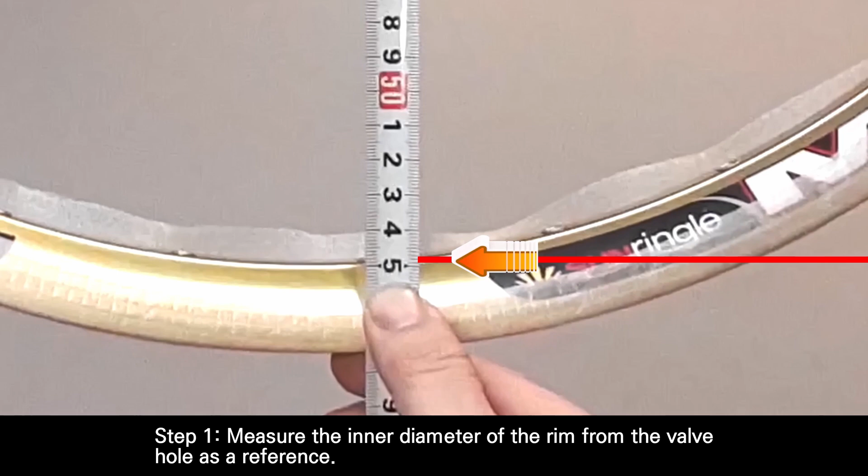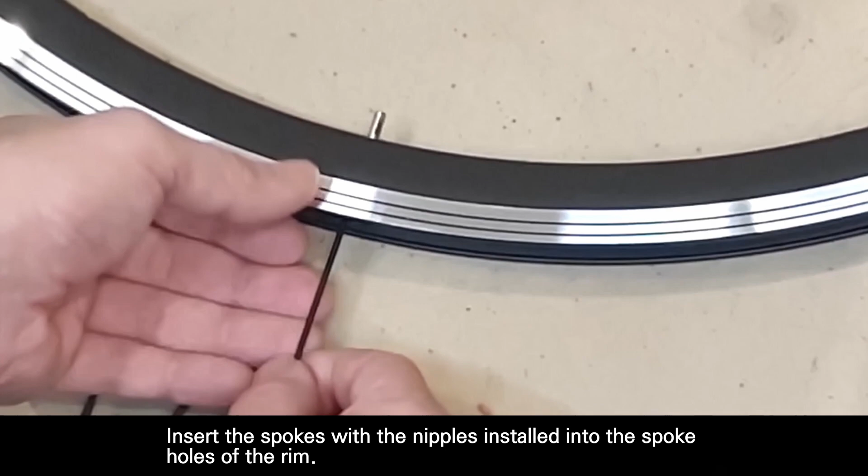Prepare a ruler and use a marker. To take the measurement, use a ruler starting from the valve hole of the rim and measure downwards. Step 1: measure the inner diameter of the rim from the valve hole as a reference. Step 2: prepare the spokes and nipples and insert them in the opposite direction. Insert the spokes with the nipples installed into the spoke holes of the rim. Use a marker to color the protruding nipples.

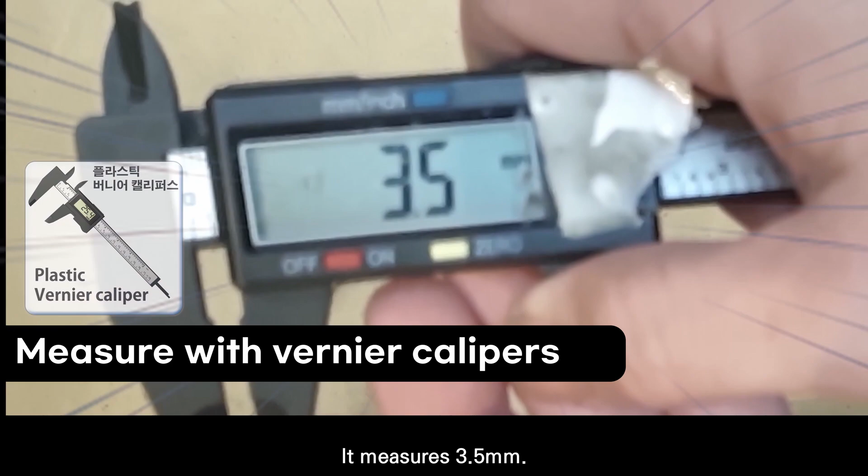Once done, remove them and use a vernier caliper to measure the length of the uncolored section. It measures 3.5 millimeters. It is possible to measure accurately, including the thickness of the rim up to the head of the nipple. The effective rim diameter is calculated by adding the two nipple measurements of 3.5 millimeters each, which equals 7 millimeters, to the inner diameter of the rim.

Effective rim diameter. Now we will measure the width of the hub motor axle. You can measure the width by cutting a piece of firm paper to size or using a wheel truing stand. For this demonstration, we are using a hub motor with a width of 100 millimeters.

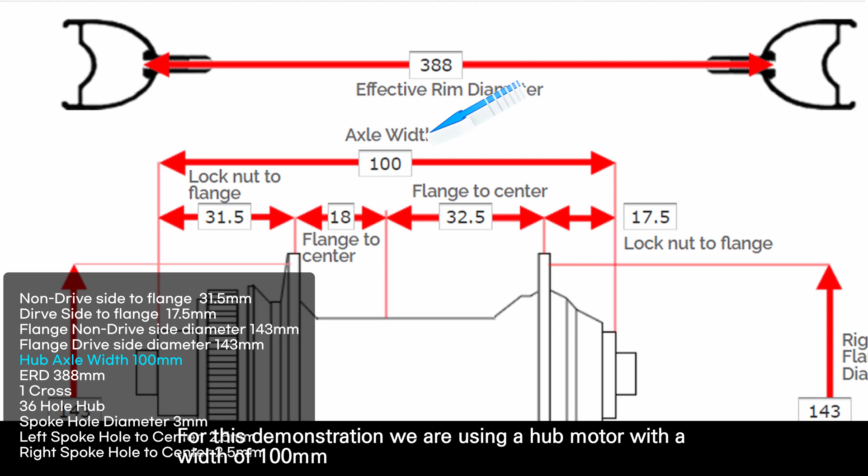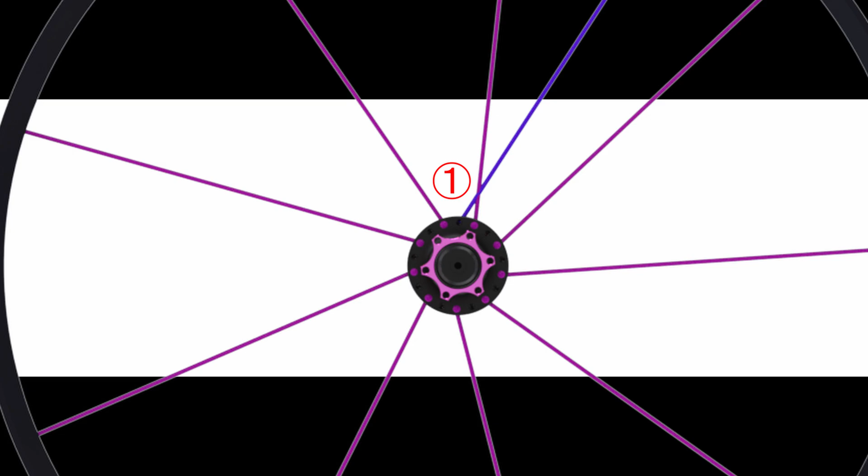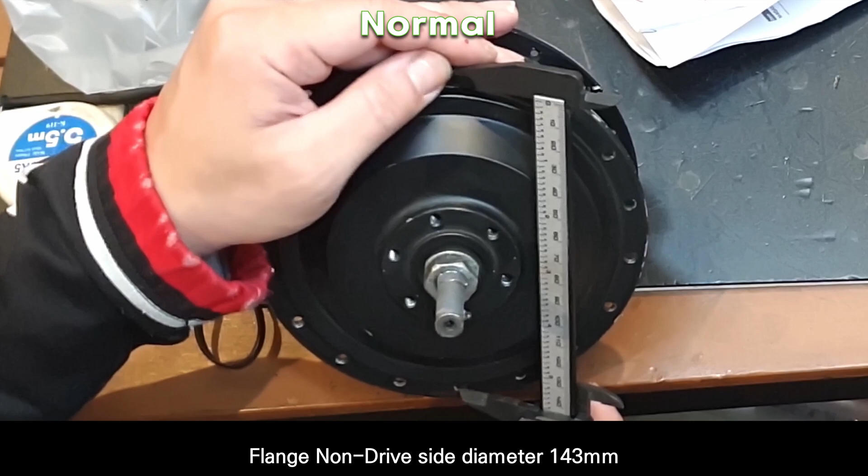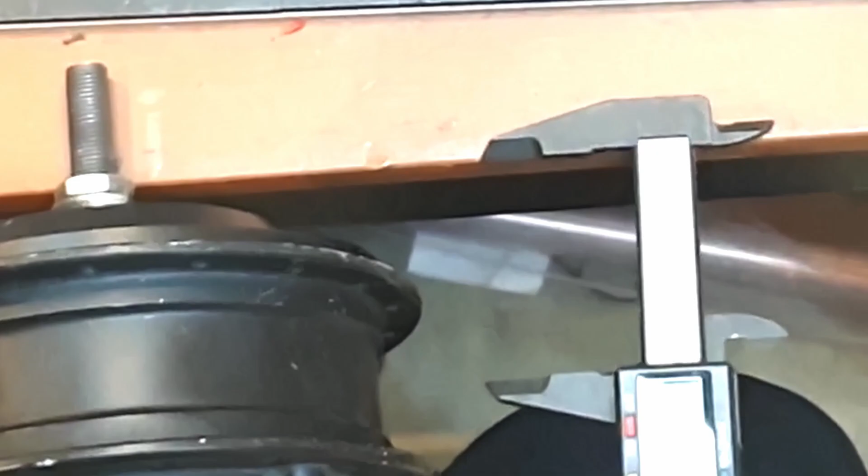Number of spokes. Spoke lacing pattern. Flange non-drive side diameter: 143 millimeters. Non-drive side flange diameter. Drive side flange diameter. Spoke hole diameter: 3 millimeters. Non-drive side to flange. Drive side to flange.

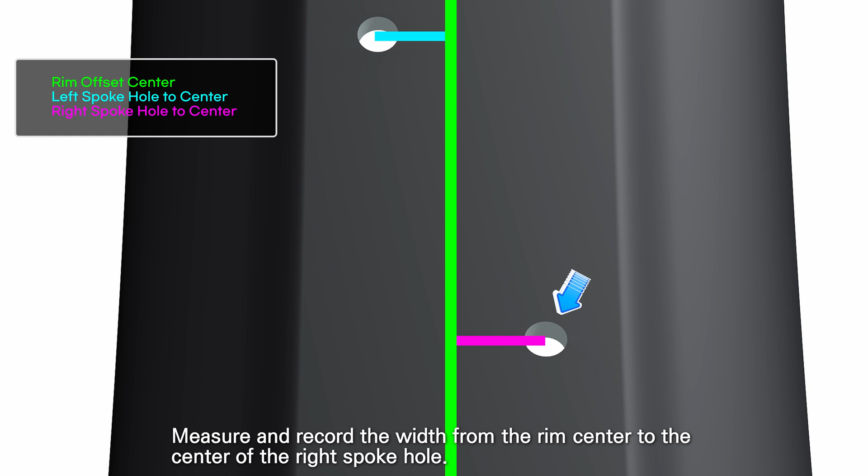First, check the rim center. Measure and record the width from the rim center to the center of the left spoke hole, and the width from the rim center to the center of the right spoke hole. Again, check the rim center, and note the left and right spoke hole distances from it.

Now, this is the most important step. To calculate the length of the left spoke, add the flange distance to the left measurement taken from the rim and subtract the right measurement from it. You have now calculated the length of the left spoke.

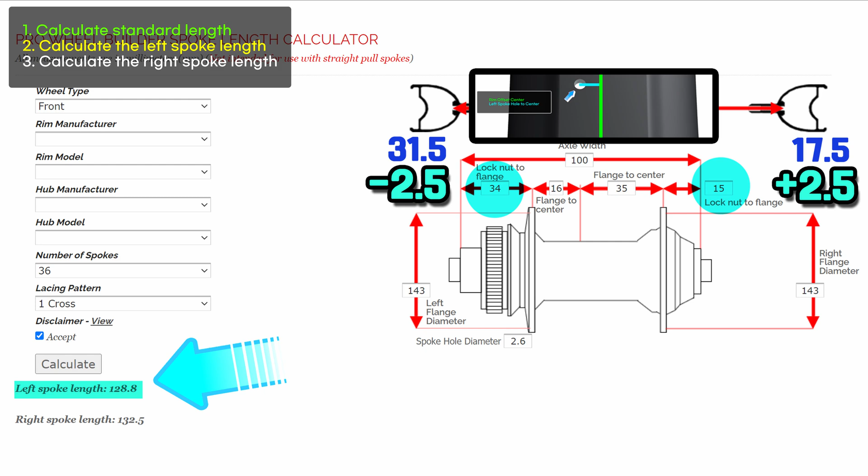Next, to calculate the length of the right spoke, add the flange distance to the right measurement taken from the rim and subtract the left measurement from it. The calculation of the length of the right spoke is now complete. You can calculate the measurement twice, adding and subtracting the distance accordingly.

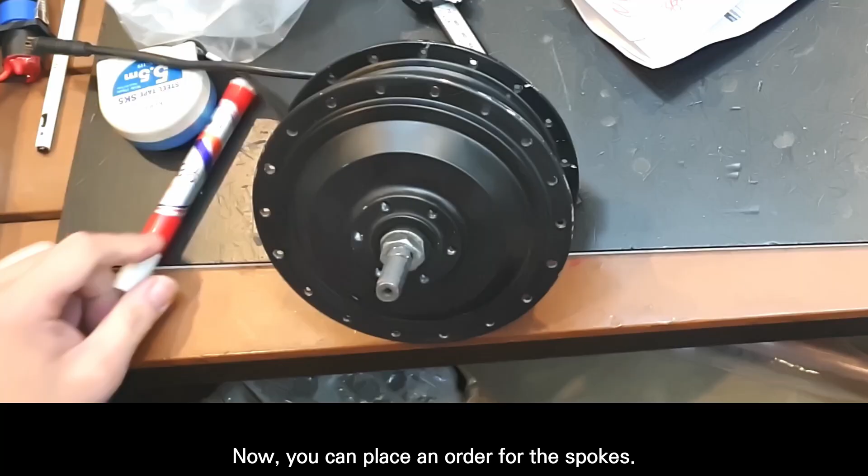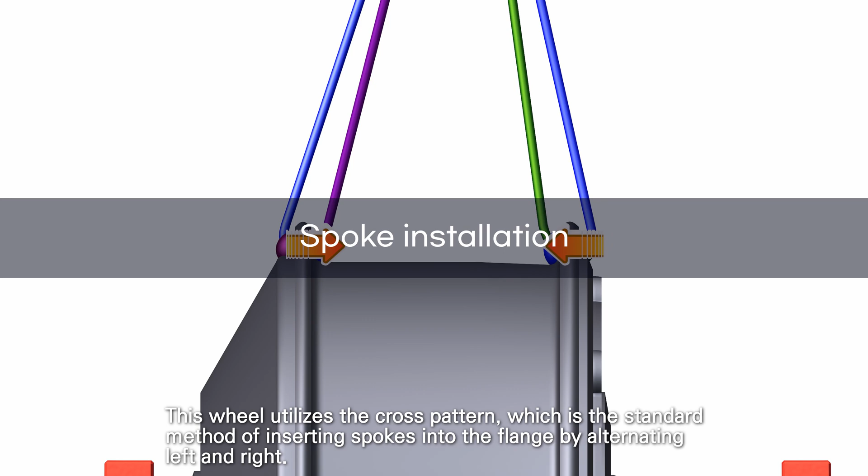Now you can place an order for the spokes. For this demonstration, we will be using 13G spokes, which are smaller than 12G spokes. This wheel utilizes the cross pattern, which is the standard method of inserting spokes into the flange by alternating left and right.

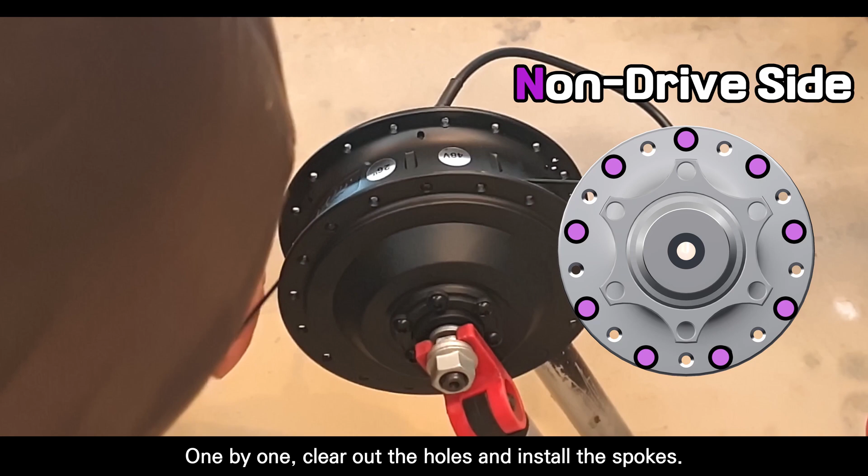We tried various methods, but this one was the easiest.

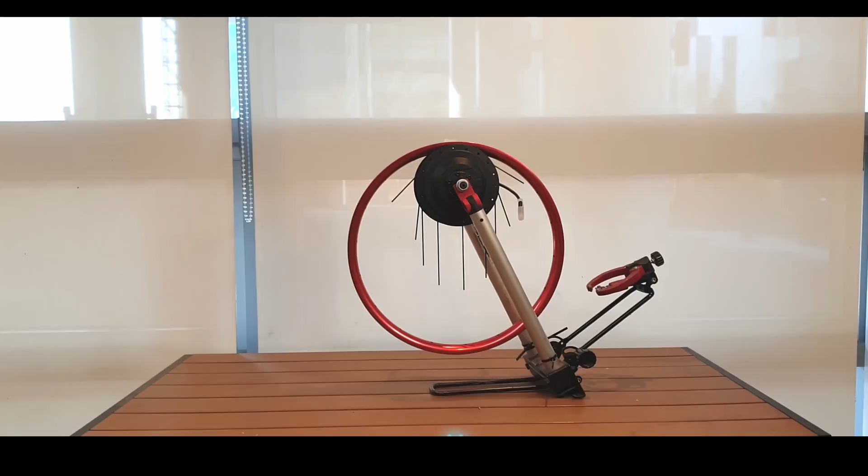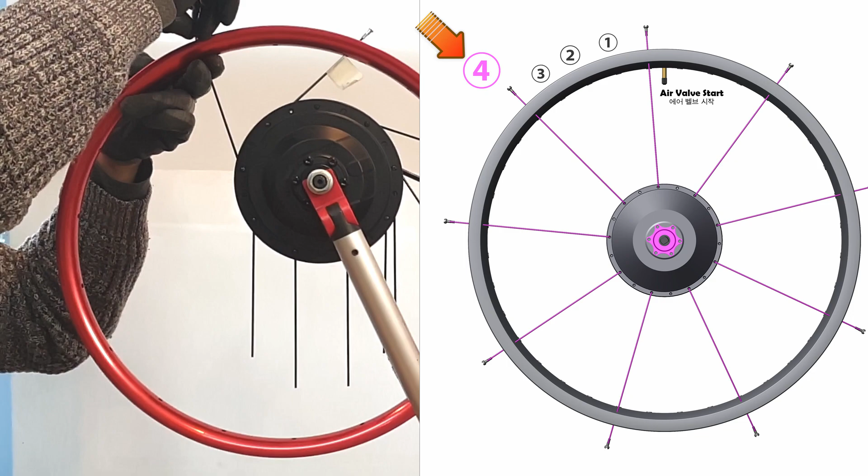It doesn't matter where you start on the non-drive side, just start building the wheel. Tighten the nipple, leaving only 1 mm of thread on the spoke. Put a marker tape on the first spoke installed next to the valve hole. Jump 3 holes from the first spoke and install the next spoke. One, two, three, four.

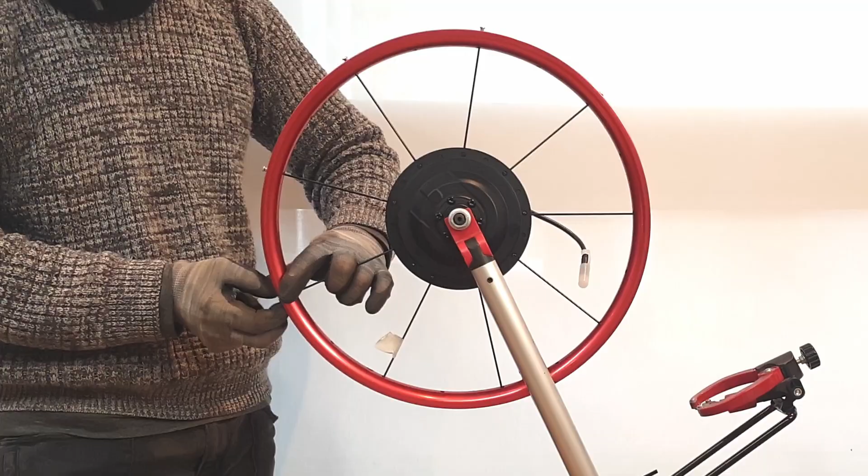First pattern complete. Second step, flange B: fit the spoke inwards from the outside.

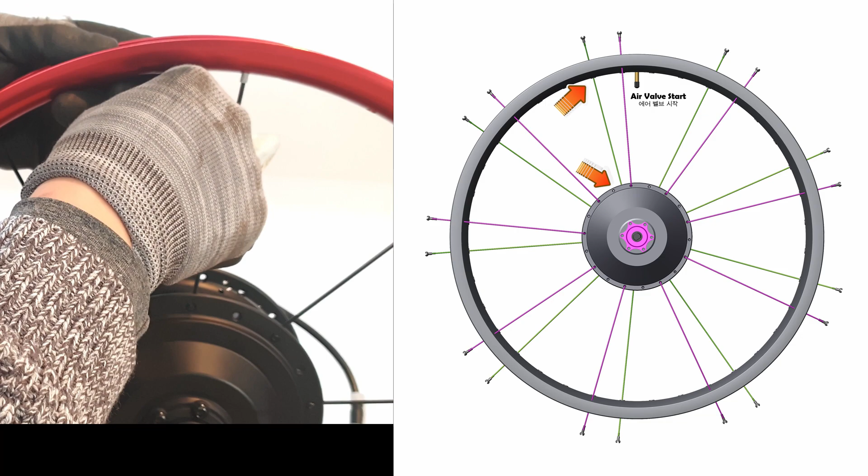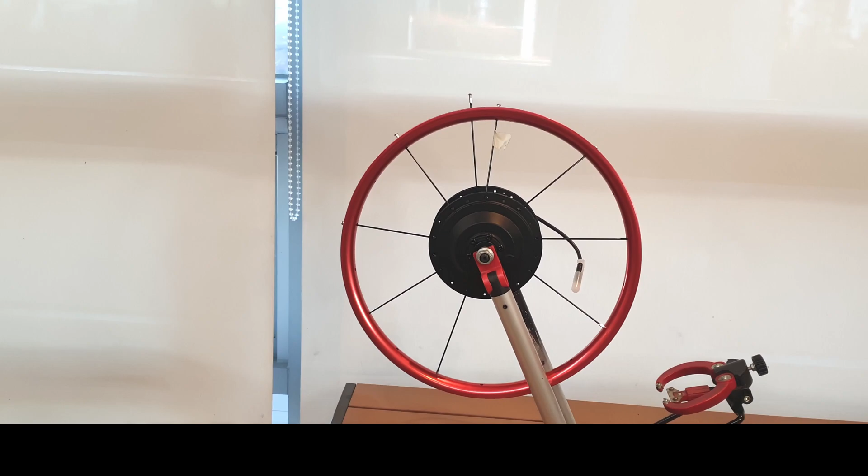From now on, it's the same pattern: jump 3 holes and install the spoke. The next spoke jumps 3 holes as well.

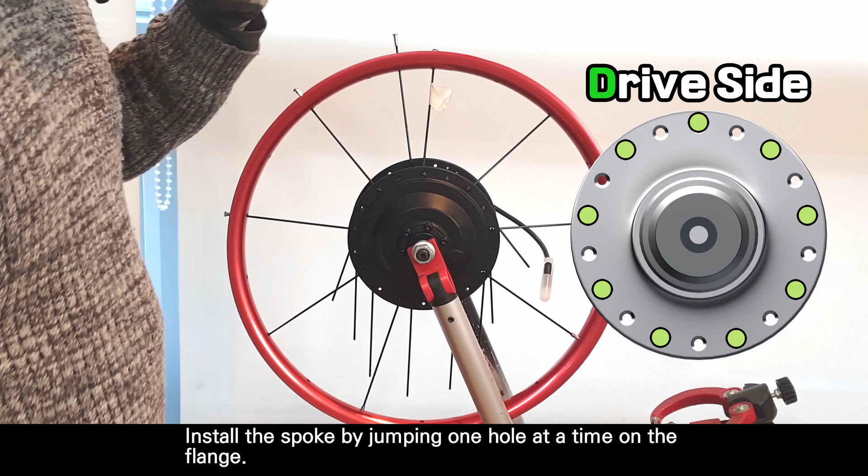Install the spoke by jumping 1 hole at a time on the flange. All the spokes have been installed now - 3 jump, then 4. Insert them just enough so they don't fall out.

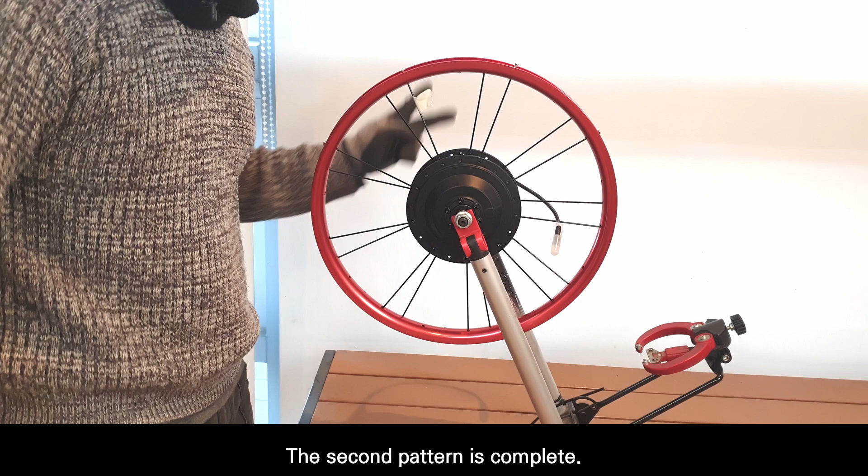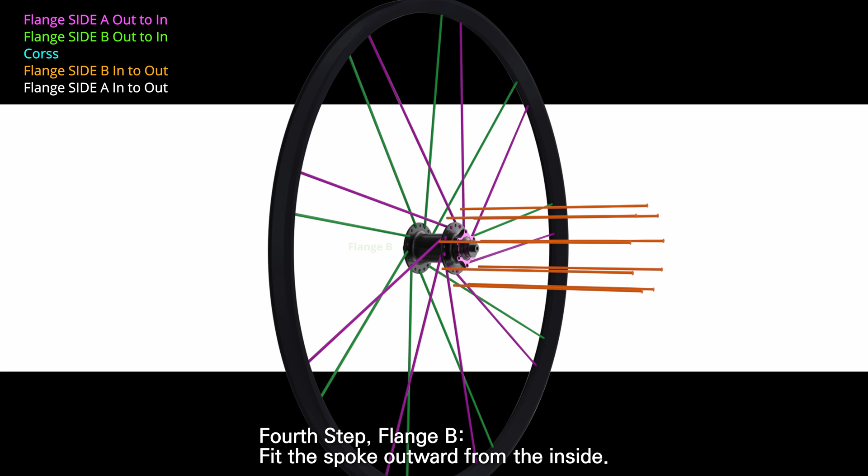The second pattern is complete - pattern 2 finish. Now rotate the hub with the spokes installed in the opposite direction of the valve hole to create a cross pattern. Flange B: fit the spoke outward from the inside.

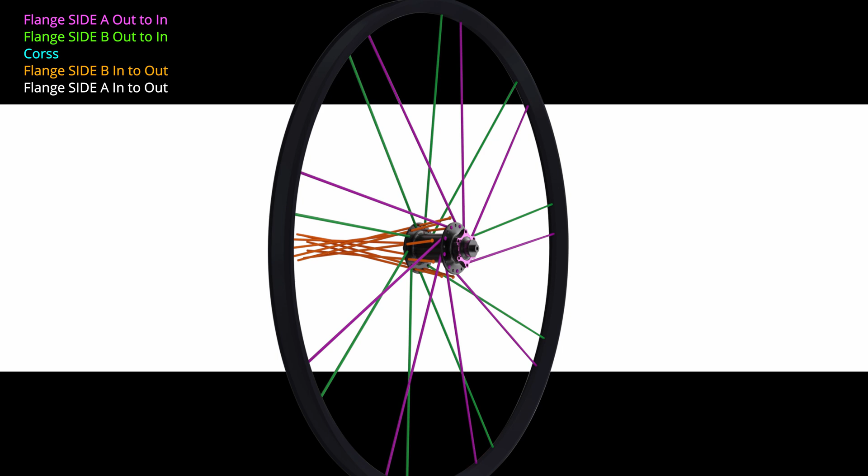Install all the remaining spokes in the holes on this side. The installation direction is flange in to out.

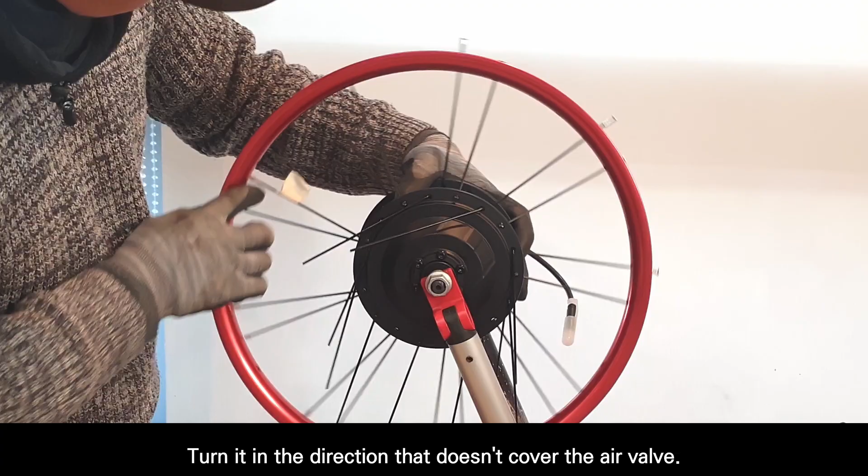In the second step, turn and twist the spokes. Turn the valve in a direction out of contact, so it doesn't cover the air valve. Give it a little shake.

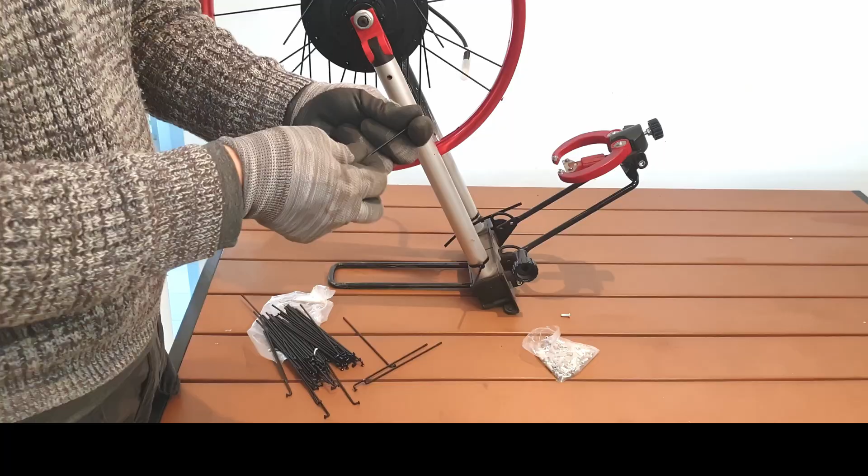Make sure all the spoke nipples come out of the rim - it's easier to install once they're all out. Prepare about 18 nipples, turning and fitting them to get ready.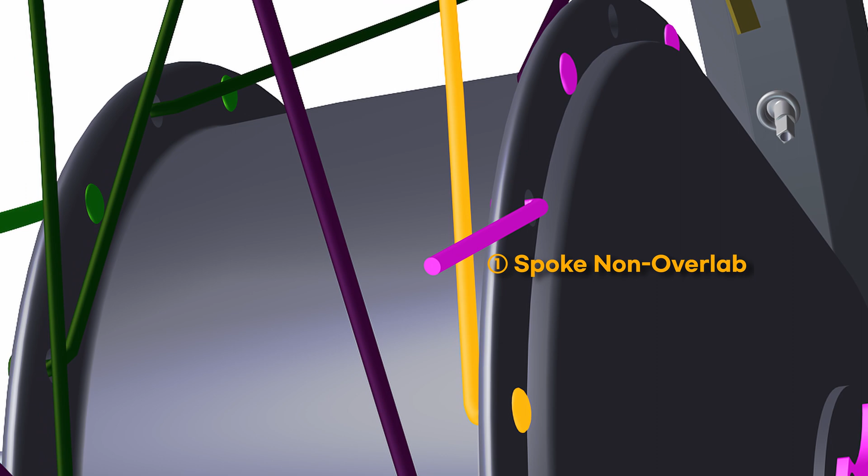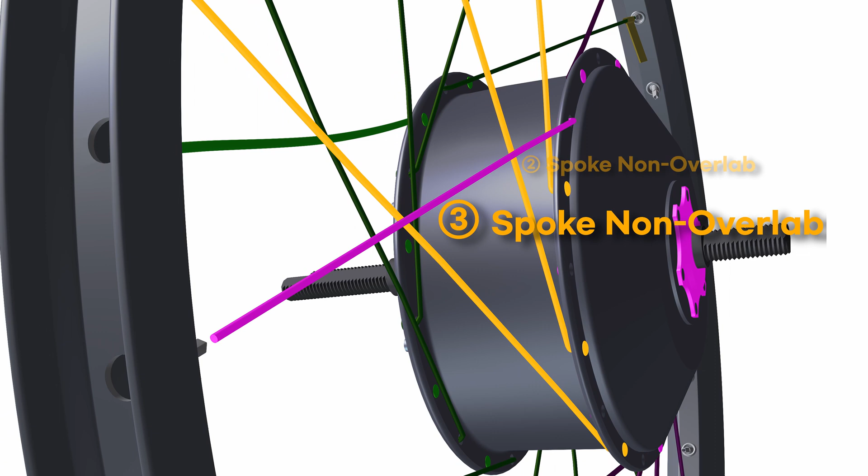Electric bicycle spokes are very thick, so they don't overlap and just pass through. This wheel is installed in a non-overlap pattern with only one spoke crossed. Install in the empty spoke holes using the same pattern.

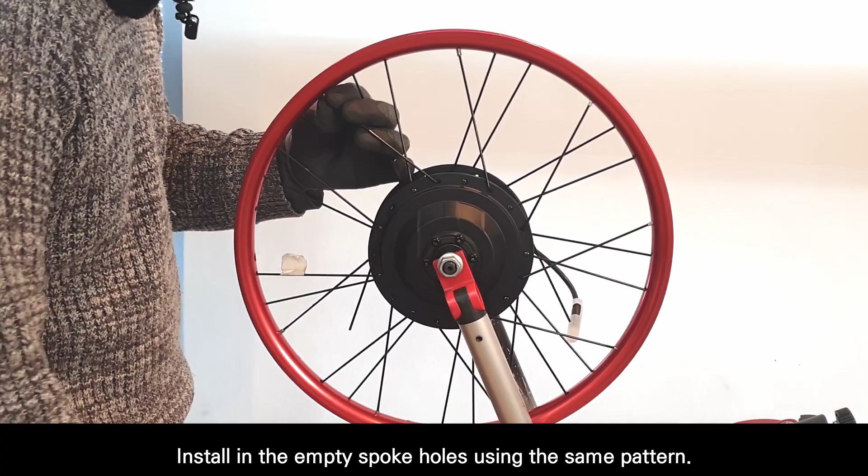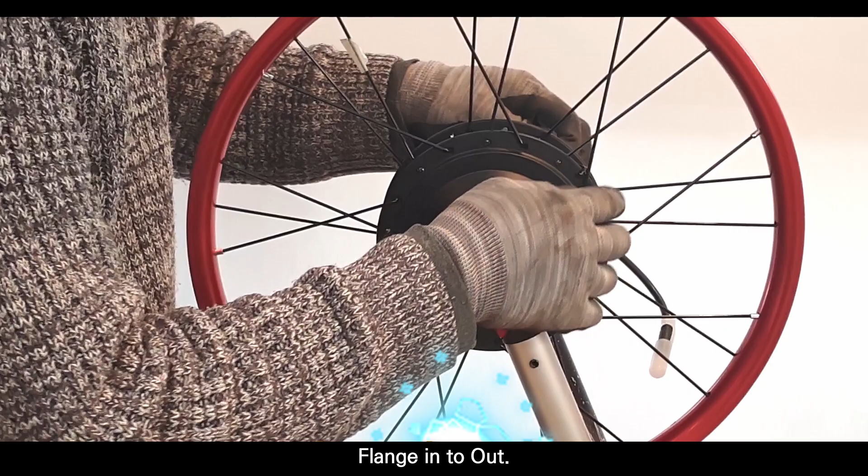Finally, the fifth step is to install the spoke in flange A, outward from the inside. This is the next spoke installation direction: flange in to out. Install all the spokes in the empty holes.

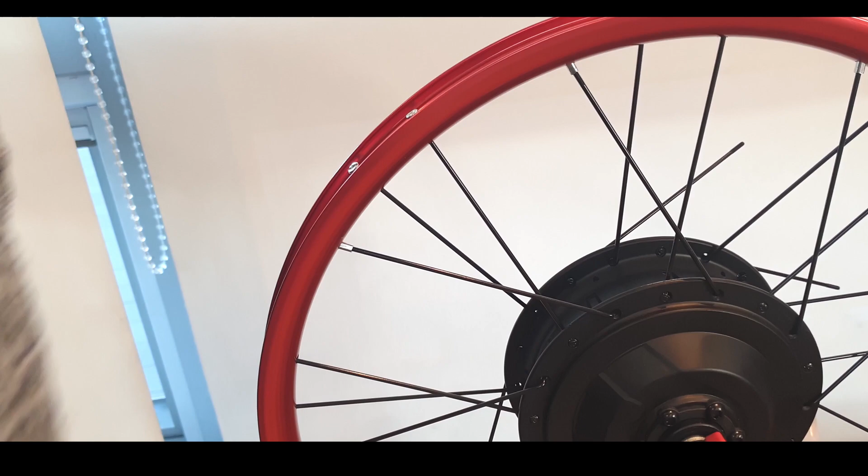Install all the spokes in the empty holes. The pattern is the same. Install them all in a one-cross pattern. One cross pattern finished. Okay, perfect, next.

One millimeter left. Using a spoke wrench, you should be able to determine the start and end of wheel rotation while tightening the nipples. Attach a sticker-like tag to the spoke next to the rim valve hole. To tighten the spoke nipple, turn it clockwise. Tighten all the nipples while leaving a 1 mm spoke thread.

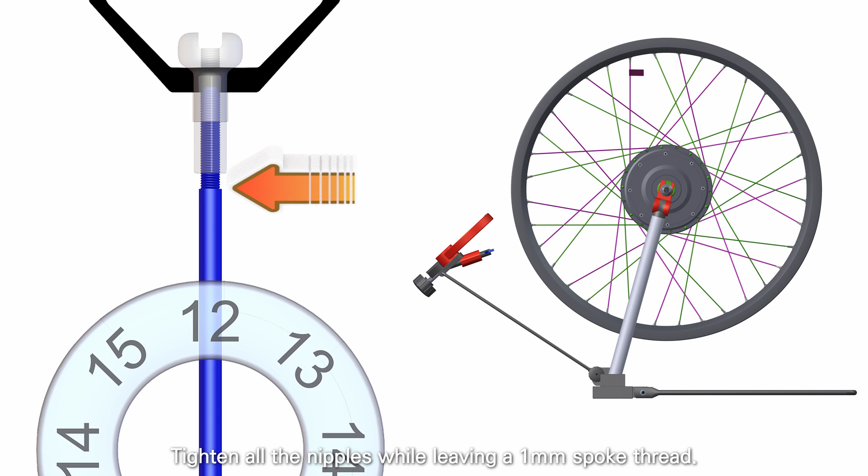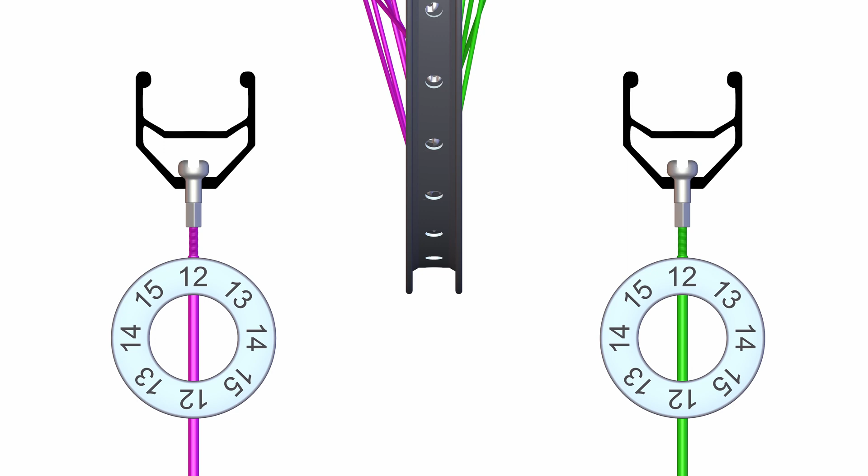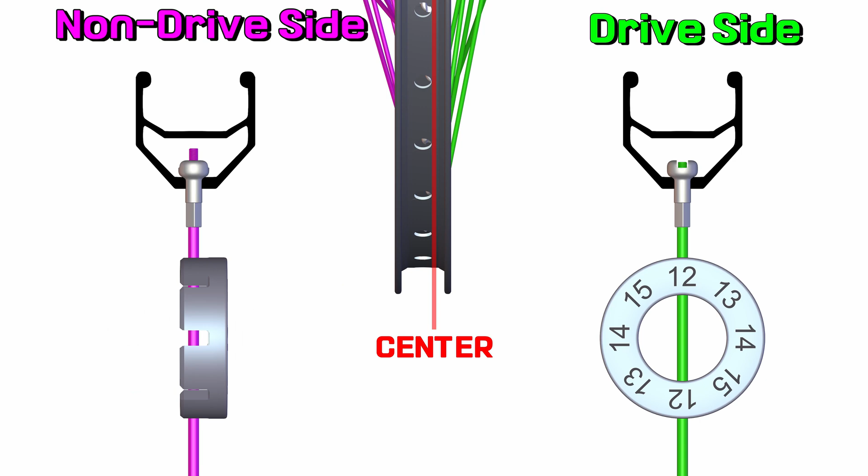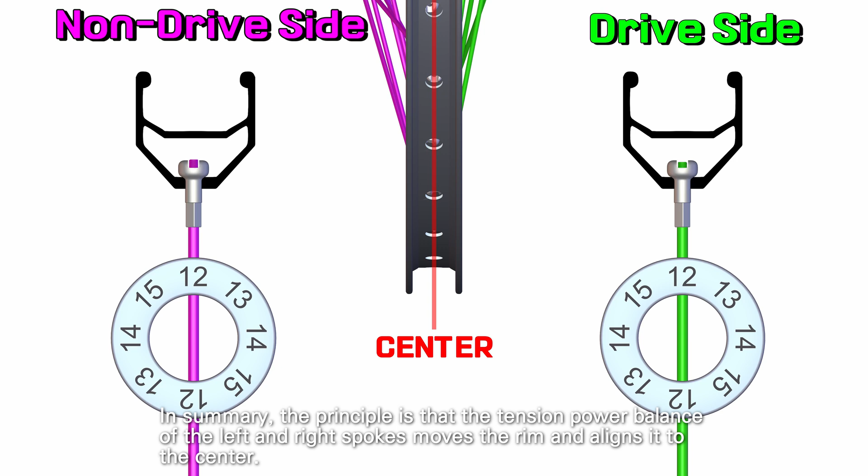First, we will explain the principle behind adjusting the rim left and right. By tightening the right drive side spoke nipple, the rim will move to the right. Conversely, tightening the left non-drive side spoke nipple will move the rim to the left. It is important to note that over-tightening the left spoke nipple can cause the rim to move too far. Releasing the nipple will cause the rim to move in the opposite direction. In summary, the principle is that the tension power balance of the left and right spokes moves the rim and aligns it to the center.

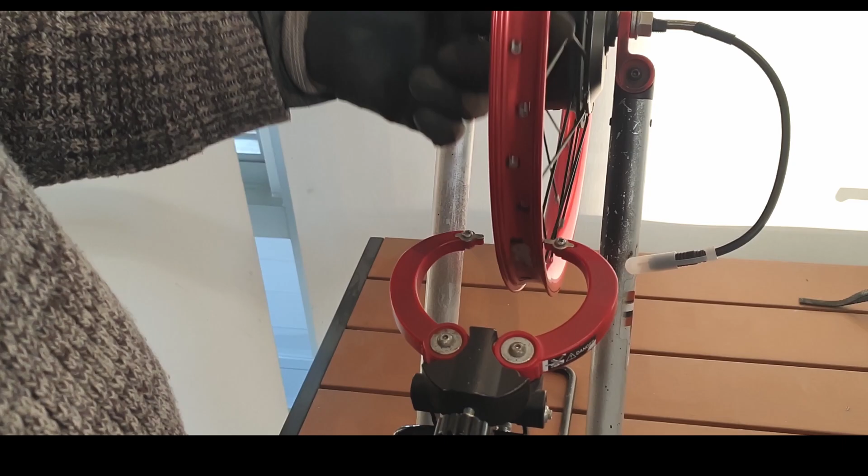Even if the spokes are evenly tightened, things can still go wrong at first. You might be concerned that the spokes look too long, but it's fine. A margin of error up to 2 mm is not a problem. The target tension of about 80% is reached.

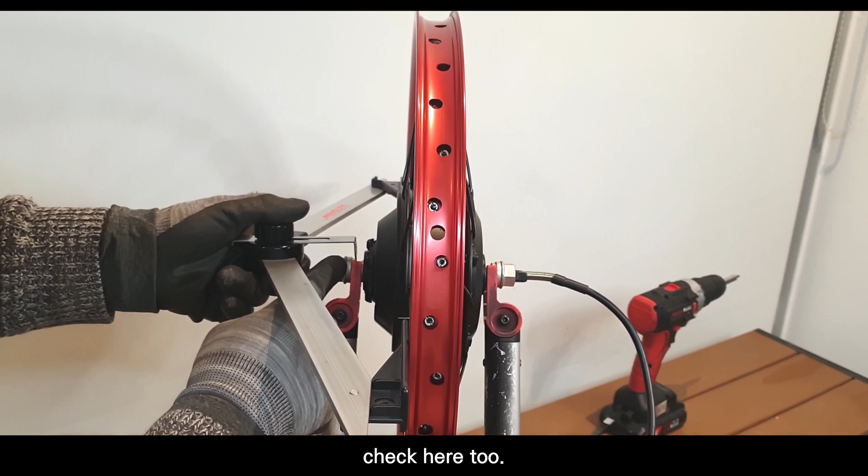Using a dishing tool while working can save time. Let's also check this area. The initial left and right tolerance is adjusted to 1 mm or less.

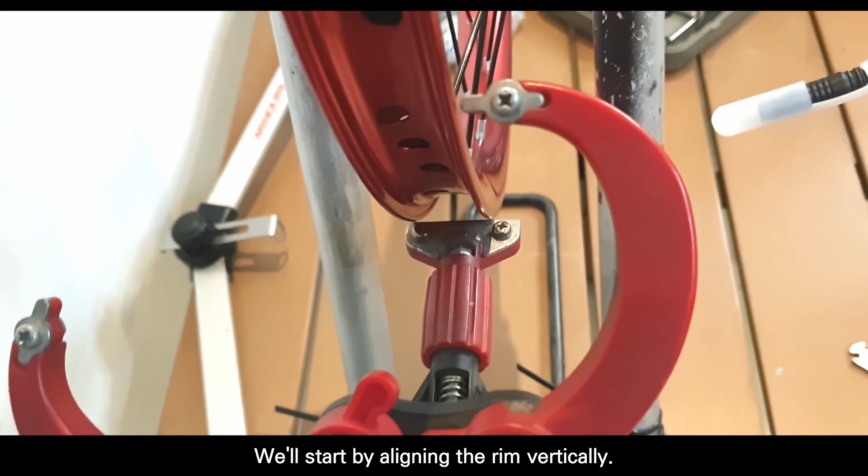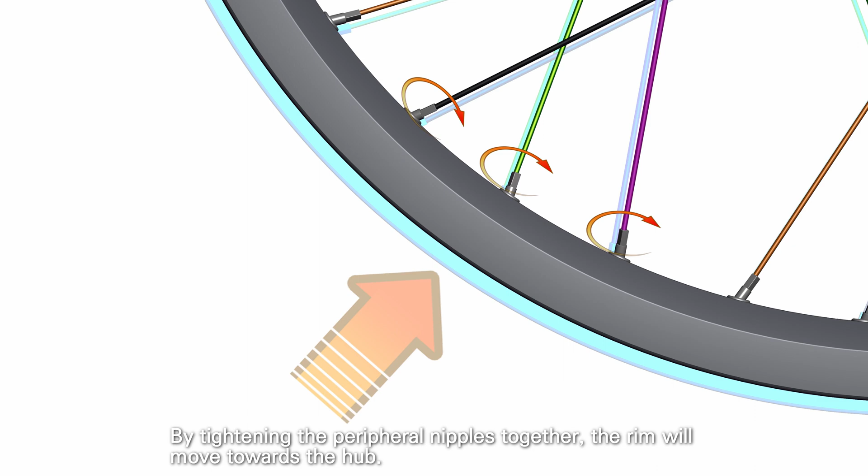We'll start by aligning the rim vertically. Secondly, let's take a look at how to align the rim up and down. By tightening the peripheral nipples together, the rim will move towards the hub. To move the rim in small increments, tighten or loosen the nipples at most 360 degrees. Loosening the surrounding nipples together will cause the rim to move away from the hub. Vertical alignment of the rim only works when the left and right spoke tensions are adjusted together.

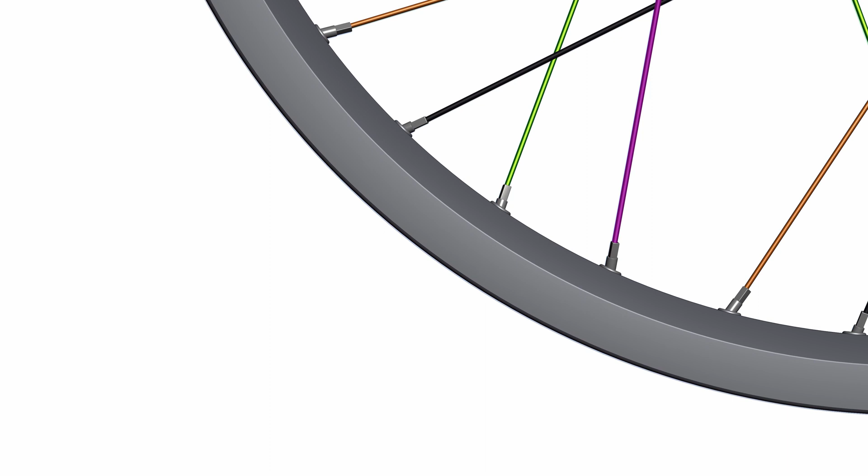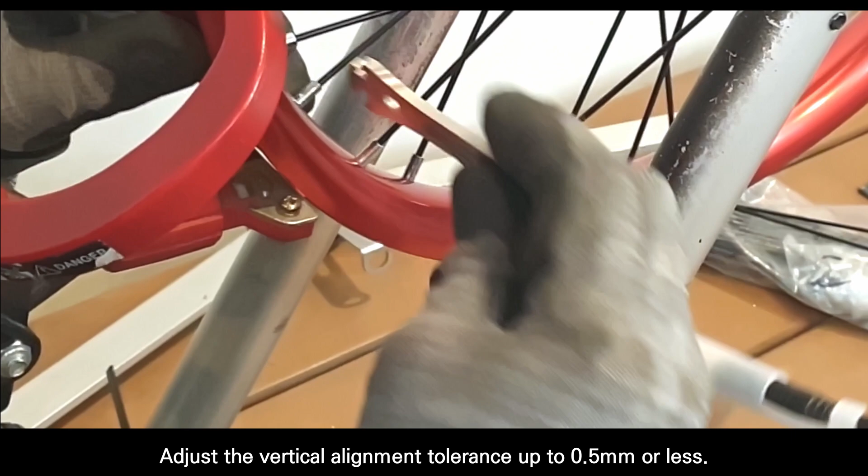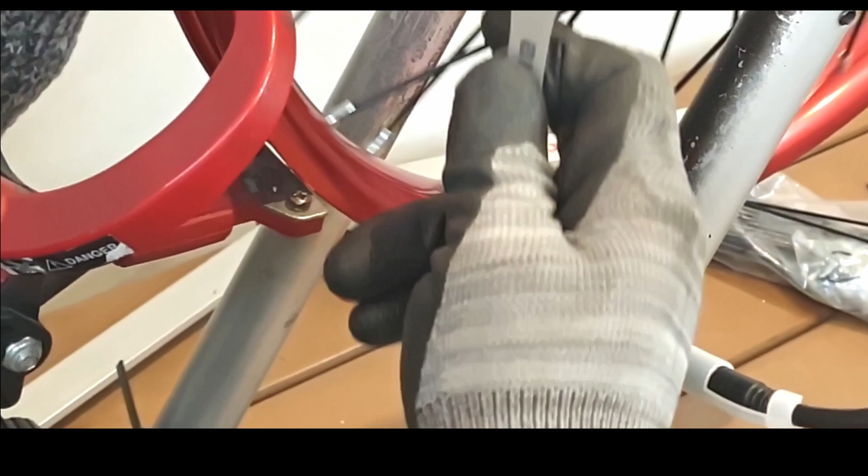Top to bottom alignment is time-consuming. The target tension of about 90% is reached. The vertical alignment tolerance is adjusted to 0.5 mm or less. If it cannot be adjusted by tightening it, you must loosen the part where the rim is inserted in order to move it. Entry-level rims are not perfectly round. Be careful, this makes precise alignment almost impossible, and results in too much tension rise. The entry-level rims have generous tolerances in the weld bead.

This is a premium BMX rim, so we can align it up to 0.2 mm. Success. From now on, check the wheel center using a dishing tool. When assembling wheels, the center can become slightly misaligned due to errors in the wheel truing stand. To correct this, a tool called a wheel alignment gauge, or centering gauge, is used.

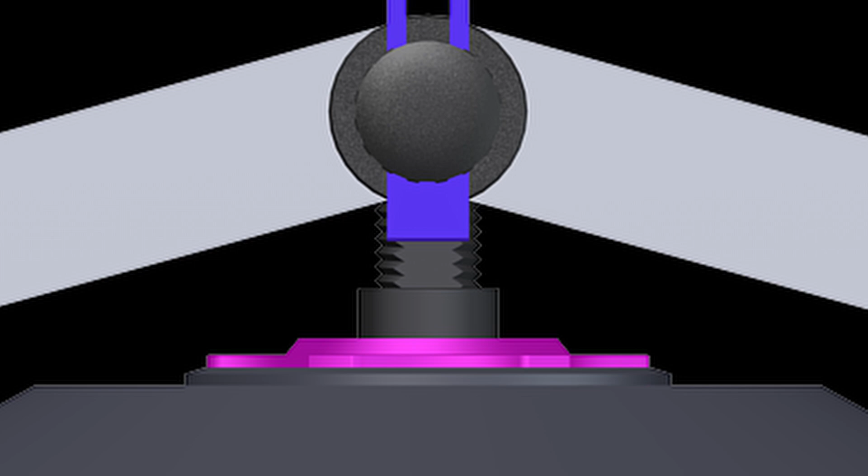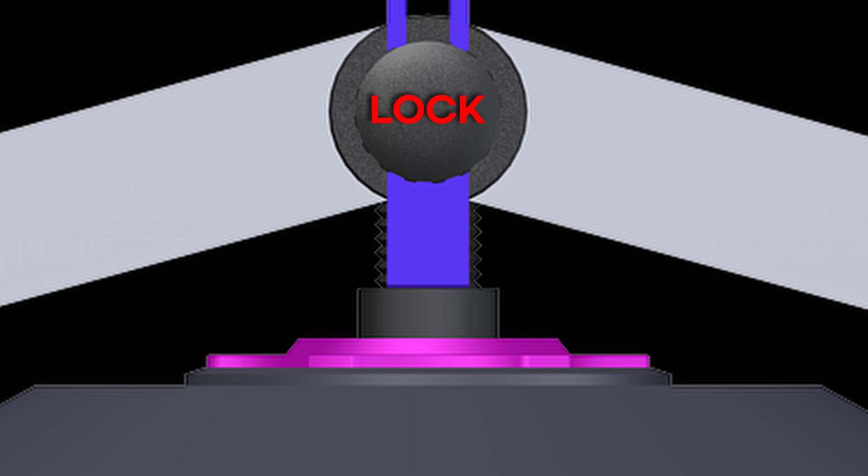First, let's set up the dishing tool on the non-drive side. Attach the gauge securely without any gaps. Now, fix the gauge in place. Move the dishing tool to the opposite position.

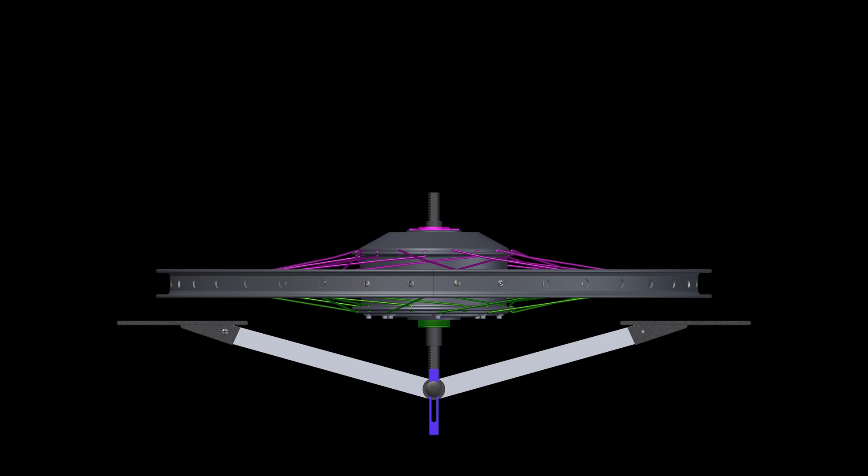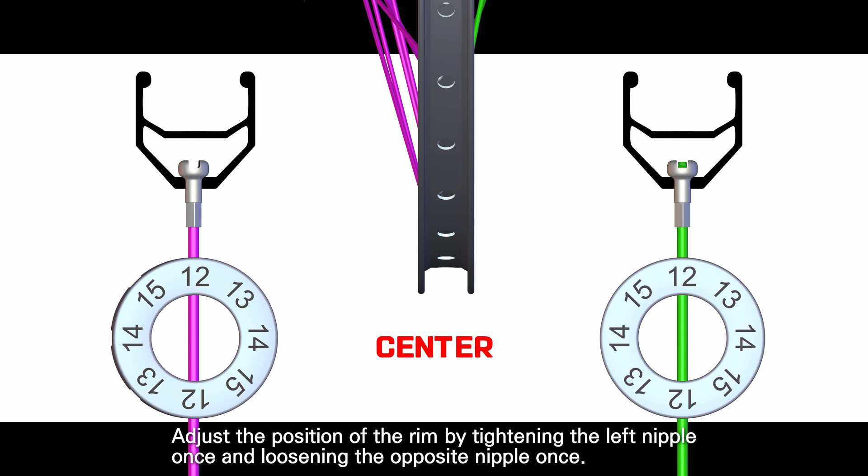The measurement shows a gap of about 4 mm. To calculate the rim displacement distance, division by 2 equals 2 mm rim displacement distance. Now we only need to move the rim by 2 mm. Adjust the position of the rim by tightening the left nipple once and loosening the opposite nipple once. This will allow the rim to move without changing the tension of the spokes.

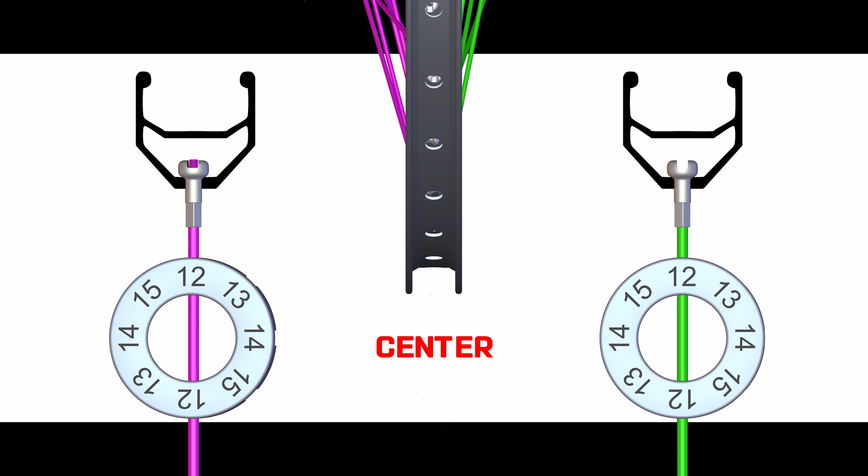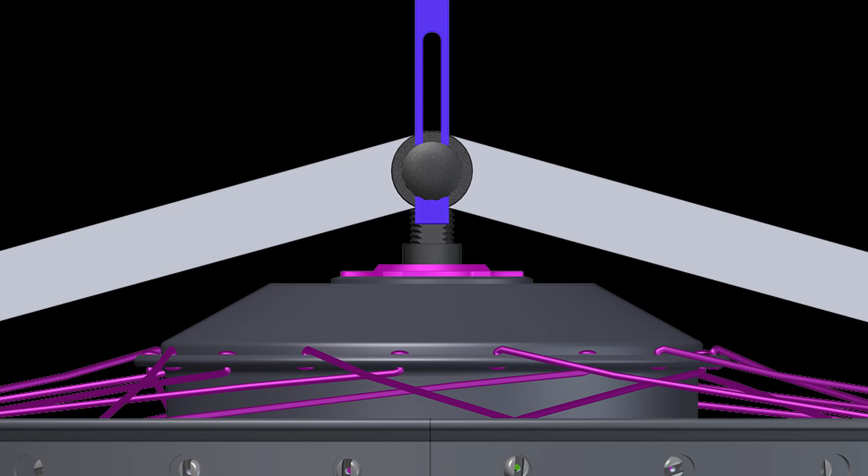Before starting the job, label the spokes and check the starting and ending positions to ensure accuracy. Start the inspection again from the beginning. There should be no gap on the drive side, and if the measurement distances on both sides are equal, the rim is perfectly centered.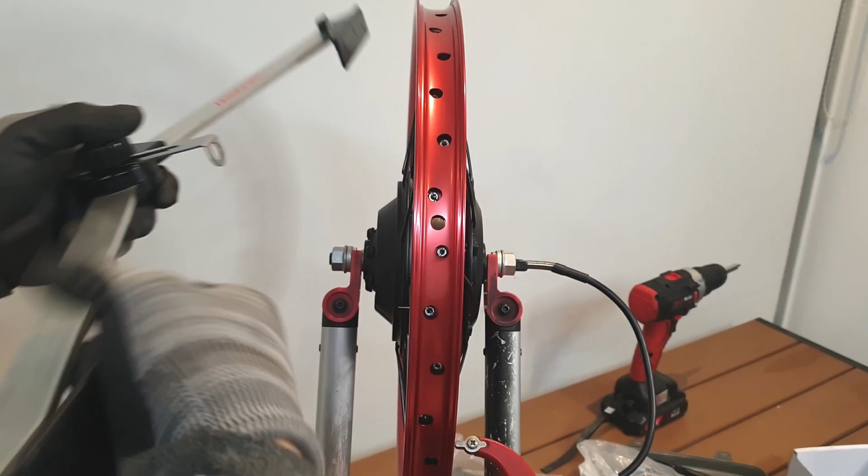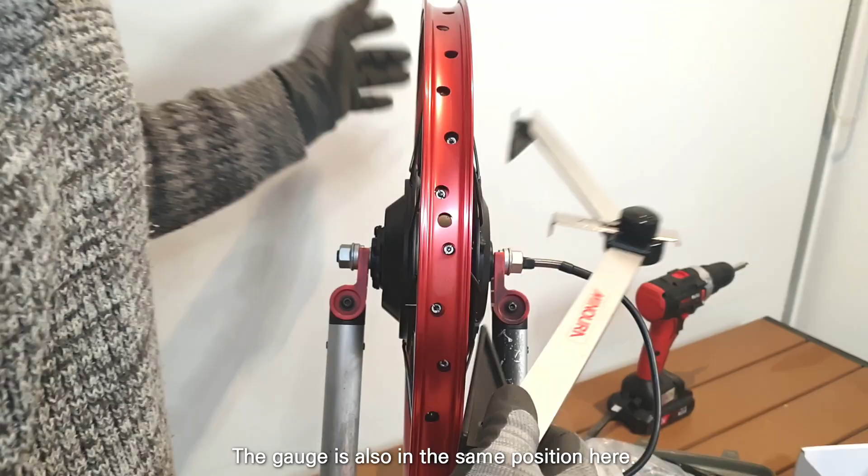Let me show you the center alignment. Take a look at the gauge position here. The gauge is also in the same position here. It's centered. Now we'll finish up.

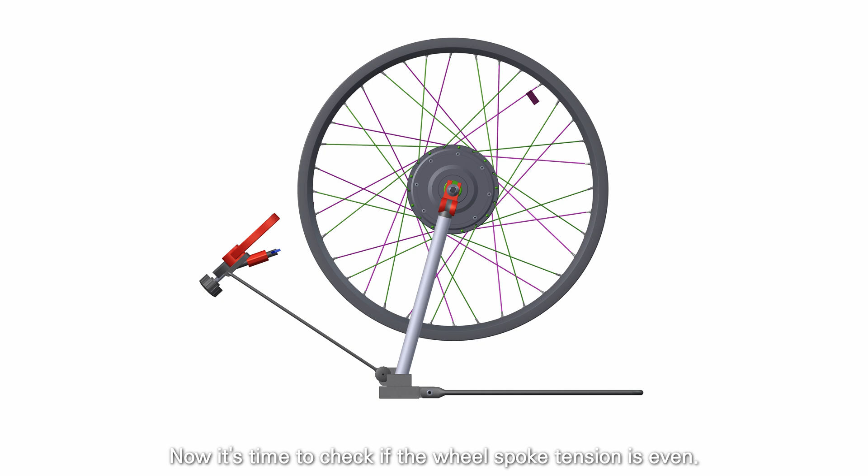Reach the target tension of 100% while aligning the wheel left and right once again. Now it's time to check if the wheel spoke tension is even. If you have a tension meter, you can use it. However, for electric bicycles, it's difficult to use because the spokes are short.

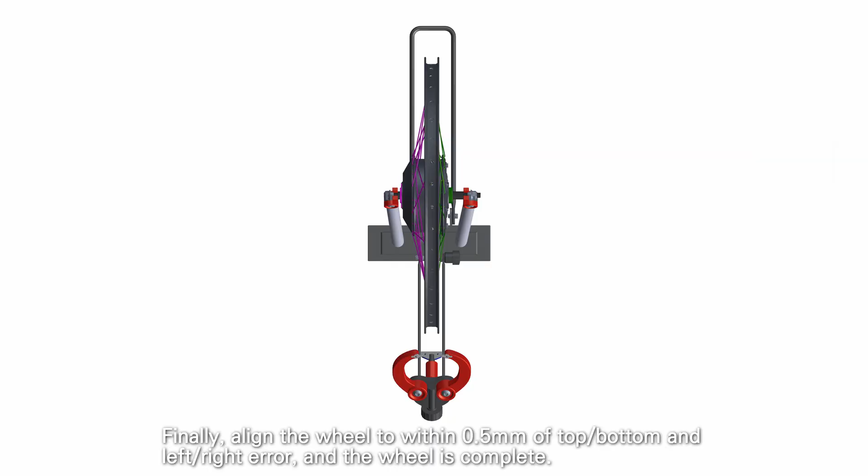Check for any loose spokes by pressing them with your hand. Yes, it's sturdy, that's fine. I recommend using a spoke wrench tool. Be careful not to over tighten, but the nipple won't break easily. A lot of torque goes into it, so be careful with this for electric bicycles too. Finally, align the wheel to within 0.5 millimeters of top, bottom, left and right error, and the wheel is complete.

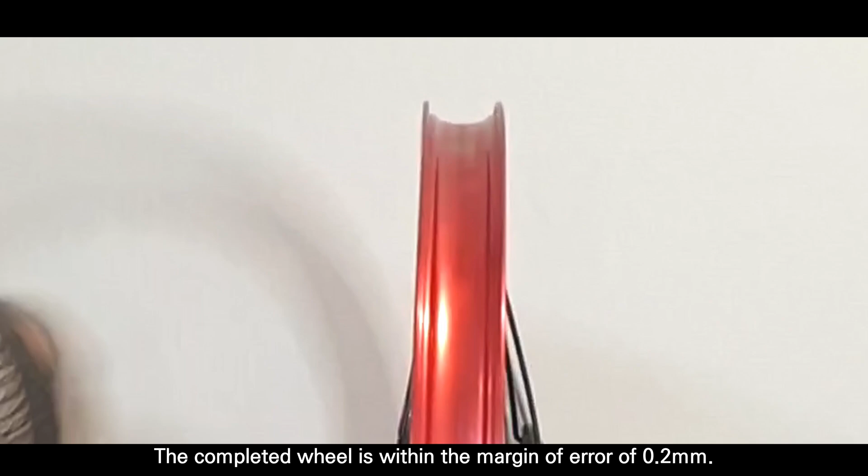By tightening each spoke nipple a little at a time, the entire wheel tension will increase and the assembly will be complete. By increasing the spoke tension, we've created a sturdy wheel. The completed wheel is within the margin of error of 0.2 millimeters.

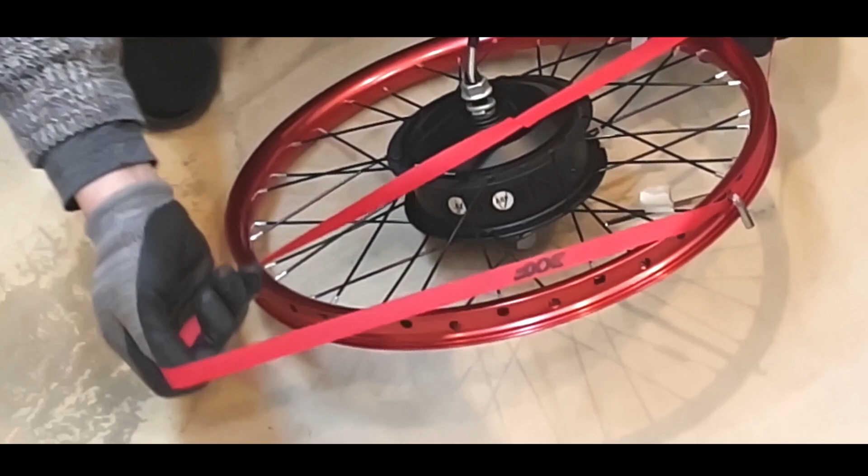Let's install the rim tape. Rim tape has been perfectly installed.